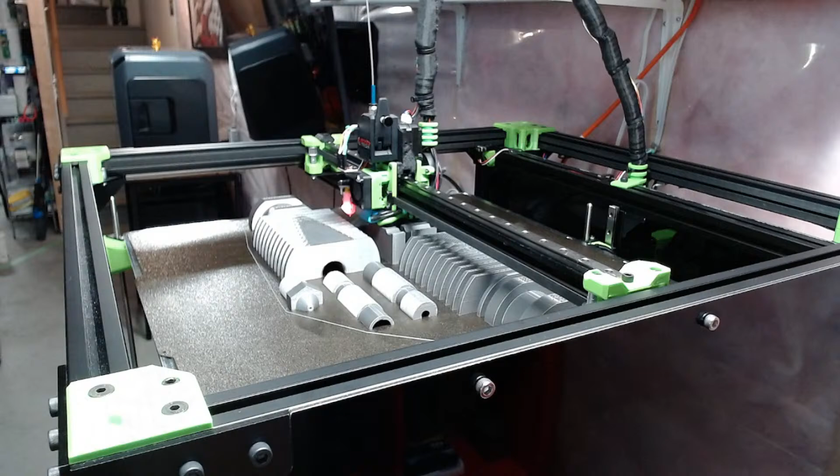I have over on this little printer over here, the Rat Rig actually working tonight - oh, and look, of course my camera's frozen when I go to put it on. But the Rat Rig is printing the E3D V6 full-size, or 500% scale model, sort of like I did those other hot ends.

That first hot end model I did, which was the standard hot end, is now available on Cults 3D, you can look it up. And then also somewhere in this room - oh, it's just over here behind me - I have the all-metal Micro Swiss hot end that's just about ready to be popped over onto Cults with all my STL files and pictures. I just got to take some pictures of that thing.

So that's kind of what's going on. And I've got the FlashForge Creator 3 over there busy printing a few of the black parts for this build that's happening tonight. I decided on the olive green and some of the black parts.

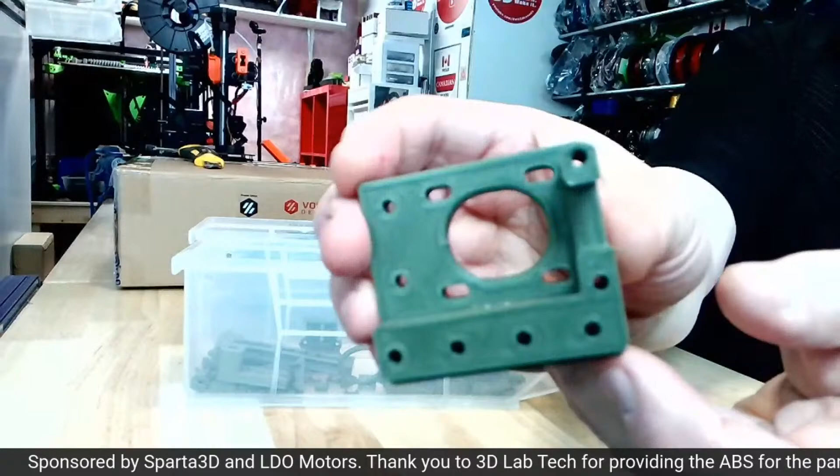Like, we're speaking zero cleanup. If you check out the quality of these prints, this is how they're coming off the printer. And the holes, zero cleanup, period, on these parts.

I'm just saying I'm quite impressed with it, but I'm also overwhelmed by the number of parts that are involved in this.

Let me grab my mouse. And Brent Miller, hello, welcome. Thank you, you installed a copperhead mini bimetal heat break and a nickel-plated copper nozzle on your Creality hot end. Oh cool, I have to look into that.

You hear its name a lot, Sith Lord or Brett? Yeah, me too. And I relate Voron and Klipper, those two. Now that I've got a little bit of familiarity with Klipper from the Rat Rig, I figure, what the heck, it's time to build a Voron, and this little guy will be on display at the Calgary Maker Faire happening in May.

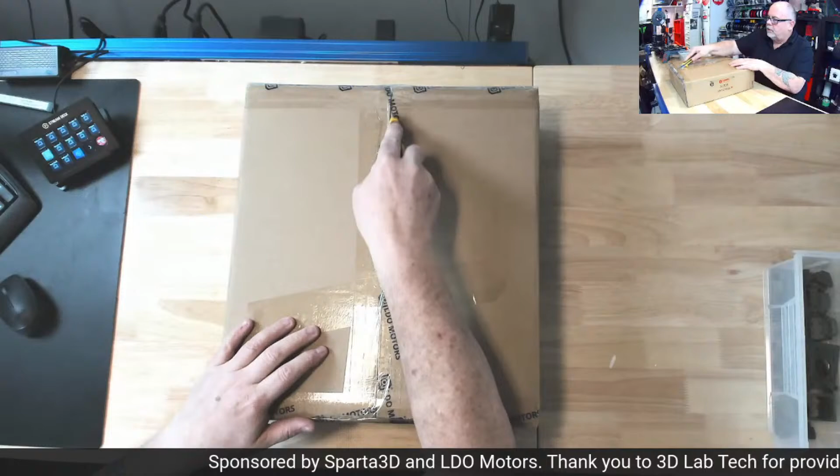And I see by the label on the side here that this is the black, I'm getting the black frame. I was wondering if the frame color would clash or go with the olive green parts I'm printing, which I call mash green because they kind of remind me of the colors of MASH, for all you old fogies who remember that television series.

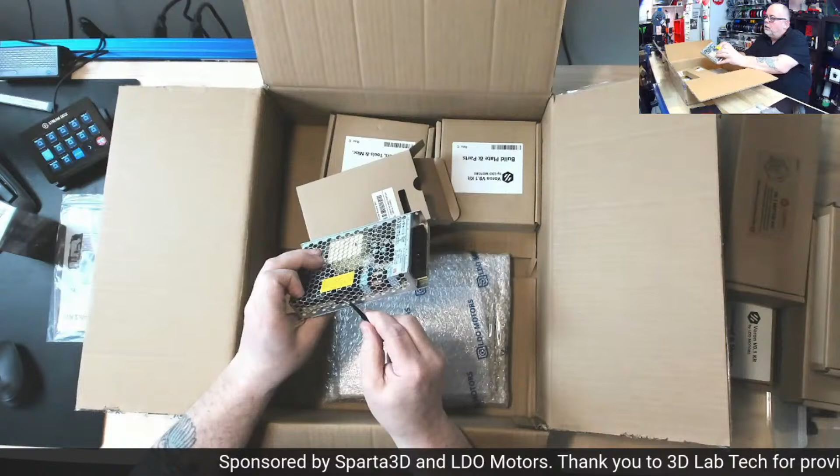In this little box we have a 24-volt power supply, and let's see, is it a branded power supply? It is a Meanwell branded power supply, 24-volt. And before I forget, while I'm doing the unboxing, I am going to flick that little switch over to 115 volt, so I don't forget that later. Well, it's on top of mind. So nice little power supply, nice to see them using a name brand Meanwell. And it's a 220, 24 volt, 150 watt, I think. Let's see, I think that's what it is. Yeah, okay. And they even tell you on the note there, make sure you check your power switch, so it's set for your proper country.

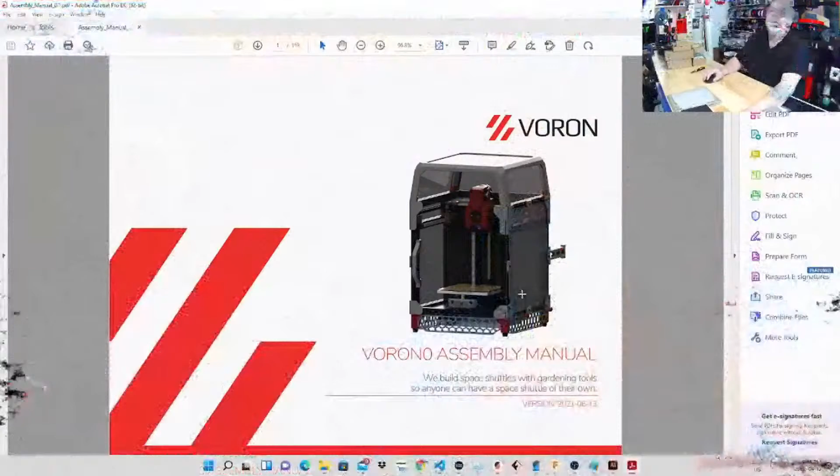So I'm going to just open a bunch of these parts right now and have a look at them. And I do have on this other screen as well, on the bottom left, I can show the full screen on that one too. I do have the assembly manual ready to go. One thing the assembly manual does mention is basically to confirm all the parts that I have received. And that's always a good thing to do, to confirm the parts before you dig too deep into the build, because the last thing you want is to get somewhere and say, oh crap, I don't have a part for this.

So I'm just going to have a quick peek at this. I have a Voron design sticker, and then this is basically a bill of parts that they have provided, and it's wow, 100 zip ties. They give you everything here, like 130 M3 hex nuts, 110 square nuts. There is a lot of hardware that goes into this little guy. Man, it seems like even more hardware than I had for the Rat Rig, but that's cool. That's very cool.

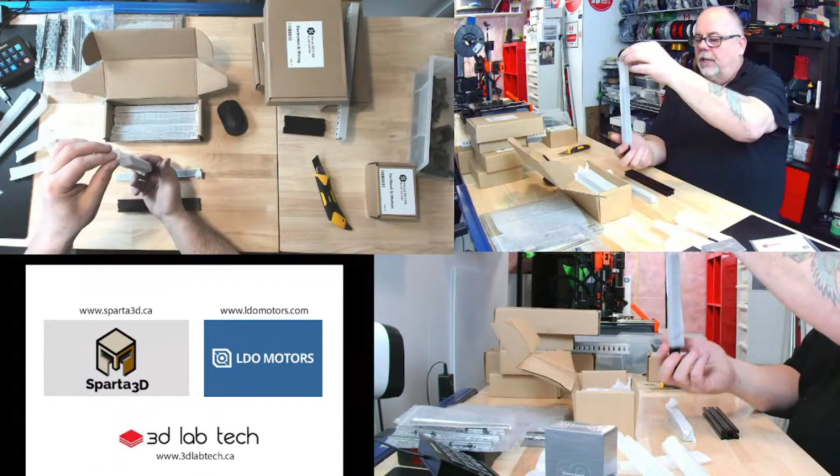Put in front pocket, give wife a hug. Just kidding, don't listen to that. Okay. Matt, do I ever listen to you?

I tell you, okay, we're just going to pull all these rails out. This is going to take up a little less space to build than the rat rig did, right? For all of you guys that saw the rat rig build, it was a beast. This is like Beauty and the Beast. So let's just get all the rails out of here.

Pop that over there. We are a responsible builder, we recycle all of our cardboard. Well, I don't, I give it to the recycle people in the city. No, I don't.

Okay, man, a lot of rails. Apparently this is like an enclosed build, it's got a top hat on it, and all kinds of stuff. I still have a lot of pieces to print, I've been printing all week nonstop on that printer. So it has a night shift, a morning shift, and an evening shift. When these prints finish, which have about another 2.5 to 3 hours to go for these black parts, then right away more parts go on. Because I still have to print all of the pieces for the top hat, I guess is what it's called on this thing.

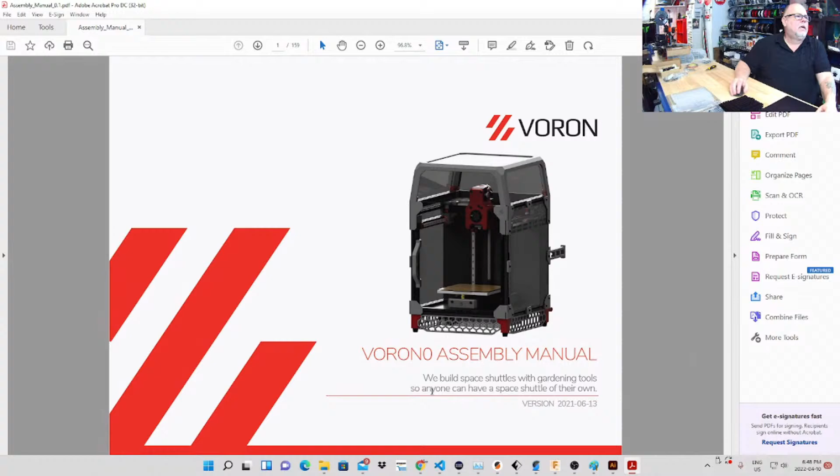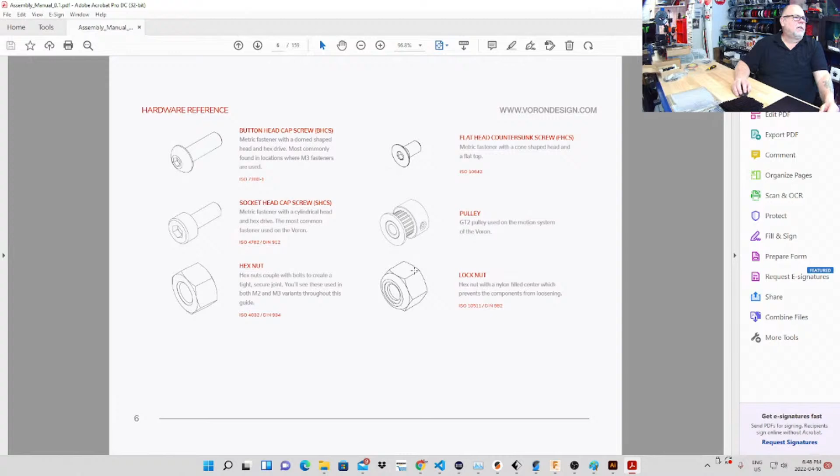Let's have a look at the manual here real quick. Not real quick, but we're going to browse through this. So we have the introduction, the hardware reference, so they talk about the hardware and the different kinds of screws - socket head, button head, flat head, etc. Then pulley versus, so we have a locking nut and a hex nut. And they're talking here about the blind joints and how they work, which is really kind of cool.

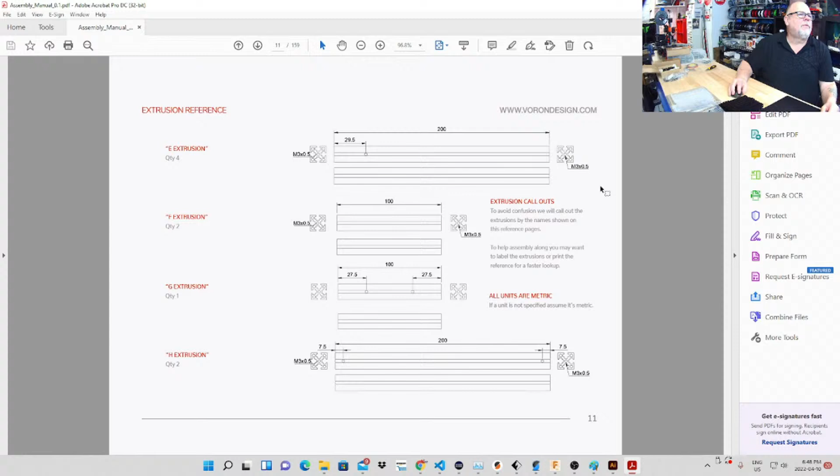Then the extrusion reference. Here's a reference for the different extrusions, A, B, C, D, E, F, G, H, and they all have subtle little differences as far as how far in your blind joint screw holes and so forth are. But they look like they're all M3 by 0.5 screws to go in them. And there's the frame assembly, which I'm guessing is going to be the first thing to do. Studs with nice racks - I didn't go there, all I can say is I did not go there.

Anyways, there we go, so component prep. Okay, heat insert - we're going to have to do heat inserts for sure on some parts. Cable chain, remove the end link. And heat set inserts - the design relies heavily on heat set inserts. I haven't done many of them, but make sure you get the proper inserts, check the hardware reference. If you've never worked with heat set inserts before, they recommend you watch a guide. I will watch the guide, I'll look for it. Let's see when we need to do the heat set inserts though.

So do I need to start prepping these components right now? I'm just seeing, yeah, so I guess I have to start prepping all this stuff is what it's saying. Okay, well, let's - okay, it's like, where do I start?

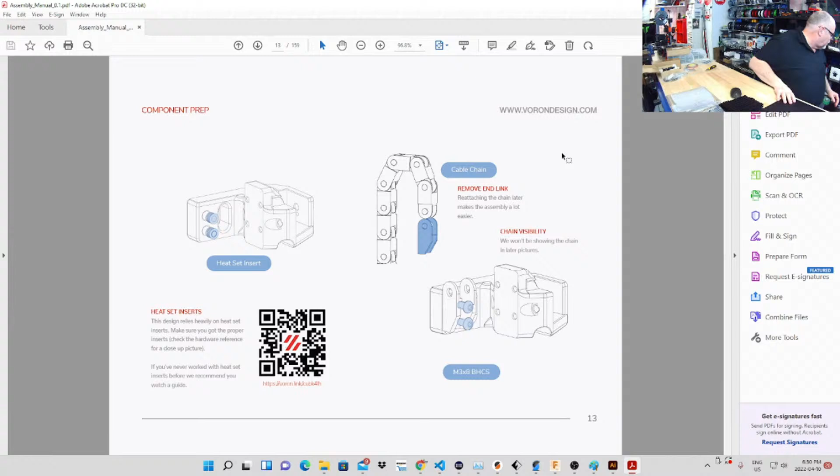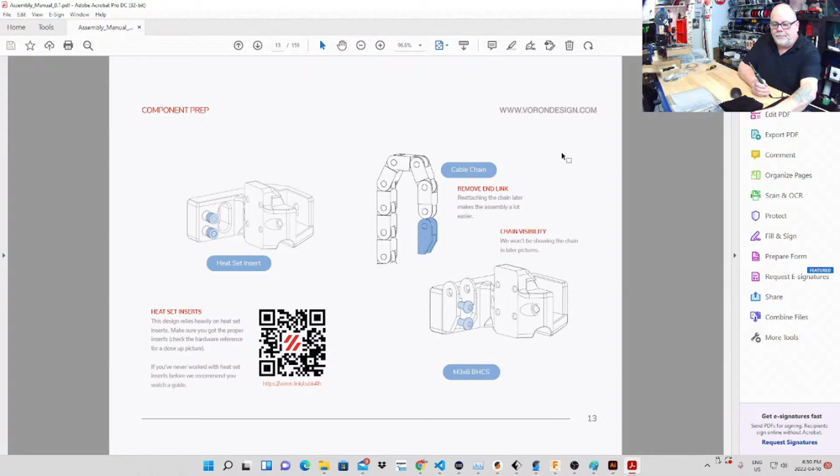First thing I'm going to check, I'm going to grab my Weller and see if this heat insert tool actually fits on my soldering iron. I know that sometimes they don't, but then again, let's see. So here's the heat set insert tool.

Well, it looks like it's even got heat sets already on it - there's 2 heat sets on it, because it's got threading in it. Oh I see, you thread them in, I think. Anyways, that's why I got to watch the little video. So let's just see if it fits on here. Let's undo this, we pull this out, we put this - come on, please fit. It doesn't fit. Don't tell me. You'd think it's too big. It's too big, darn. So that means I have to go buy a cheap soldering iron to fit this heat set insert in.

I'm surprised, I thought they would be standard. But yeah, if you look in visual you can see it. So if I go to my close-up cam, you can see the difference in size. The top one is the soldering tip that's on my Weller currently, and the bottom one is the heat set insert they provided. It's slightly bigger, but it's just big enough it's not going to fit in. And I have another soldering iron over there but it doesn't have changeable tips, so I'm going to have to get a soldering iron. This is a good Weller, it's part of a soldering station, so I'm going to have to pick up a cheap soldering iron from the hardware store, but I'll bring this along to make sure it's going to fit. So I cannot do that part of the prep right now.

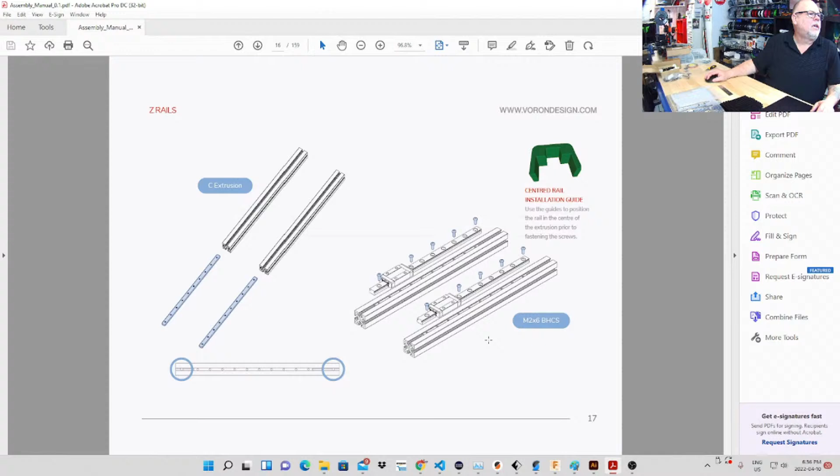Okay, I'm just going to scroll ahead a few things and have a look at what's going on here. So we have rail positioning, Z rails. We have the centered rail installation guide, which I printed. So they definitely want me to prep all these things in advance, for sure. Okay, good.

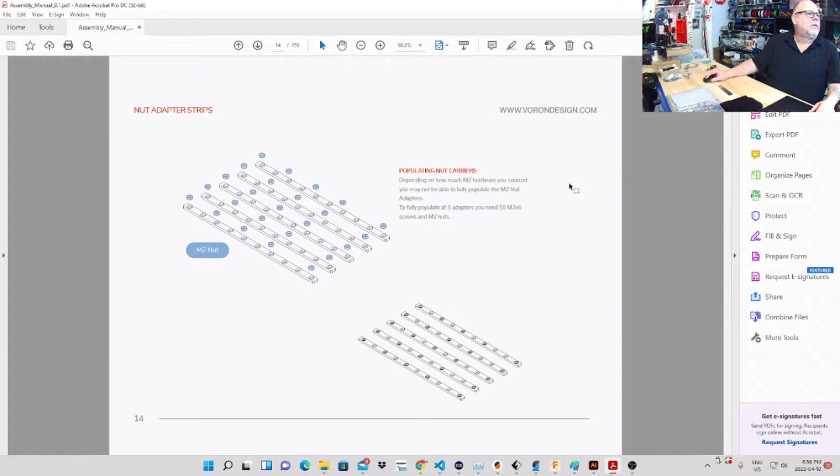Okay, well, let's go and look for the M2 nuts, they're going to be tiny. Open the hardware bag. Here we go, open the hardware bag. You thread directly into them. Oh, okay.

Okay, so if it says prep, let's see what you say. Oh I see, okay, you thread directly into them with the linear rails. Oh I get it, okay. Okay, I may not be able to fully populate them. That's what it means, okay I get it now.

Okay, let's find out which rails I need though. I need the rails that is the E extrusion. So let's go back up to our reference, the E extrusion. Let's make sure, because there's a lot of extrusions here. So the E extrusions have the holes 29.5 millimeters in. Definitely not that one.

Okay, this is why I think it takes a little time to do this, because there's so many, let's keep the ones that are similar all together here. There we go, and that's got no holes in it. No holes, no holes. Okay, that looks like an E extrusion right there, and that's because it's got the holes in one end. And that looks like one there.

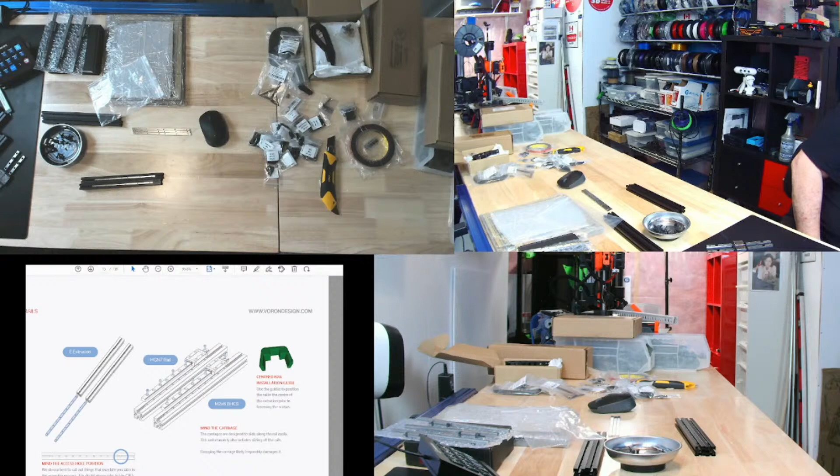This one is, I'm going to guess. There we go, I like to use my little tools. And yeah, you know, some people say, no, I want to use the tools provided by the manufacturer. But you know what, if you have better tools, use them. That's what I say. No disrespect to anybody else.

Okay, so basically we go in, and I guess positioning isn't really critical right now, so we have this on top, and they just sort of sit on the rail. It looks like they just sit right on the rail.

And it talks about positioning in the next one. Mind the carriage - it's designed to slide along the rail easily, but unfortunately that also includes off the rails, and dropping the carriage may damage it. Use the guides to position the rail in the center of the extrusion prior to fastening the screws.

Okay, so I can get the screws started here. This is where it becomes... on the rat rig I did a lot of this stuff in advance. Let's see, did I hit a hole? I hit the hole, okay, so I'm going to just get all these started. I did this in advance on the rat rig because I could. I guess I could have done this in advance here too, but I would have already unboxed all the parts and started, and you guys would not necessarily have gotten a fair view of it. But you know what, it's good to see all the work involved. So what the heck, all we're doing right now is getting all these screws started, not tightening anything. To me it looks like there's enough screw to hit every hole.

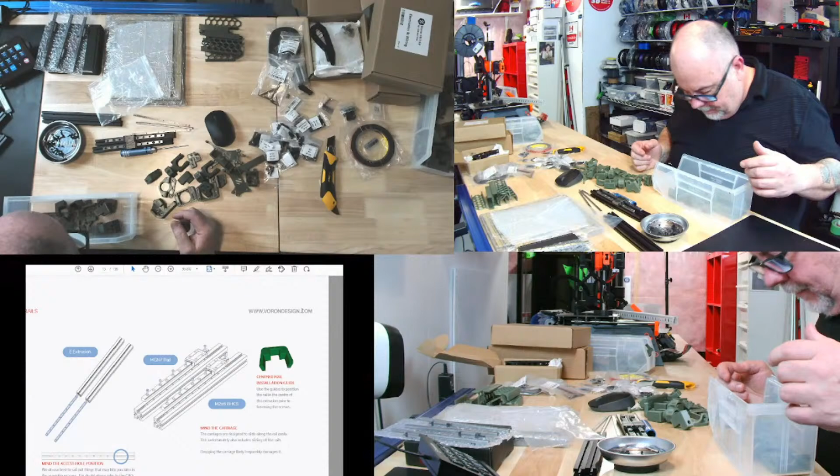For those that just joined, I printed all the parts out of ABS, and they were all printed on the FlashForge Creator 3. It's the only enclosed printer I have. There's one right there, and there's the other one right there. First time running ABS for the most part. I've run a bit of ASA, but I've never run a big job on ABS, and I am flabbergasted as to how well these parts came out.

Super, super clean, okay. So now we've got all these in, and it says to mind the access hole position, which is right here under my finger. They're going to give me a specific measurement here.

So 38 millimeters. Where is my trusty zeroed caliper... there it is. Calipers? Yeah, I think that's called a caliper. Doesn't matter, it's what I'm calling electronic digital caliper.

42 spools on the new rack with 4 PLA plus braces, not all full spools. So it's working for you, good stuff. Last saw the rat rig build, nice to see more variety of builds. Good, Canuck builder of course. Where are you from, Phelan?

Cool, so they want 38 millimeters in. Let's lock it at 38... oh, this doesn't have a lock on it. These are just cheap ones, but they're carbon fiber, very lightweight. I like them because when I'm measuring magnets it's so much easier. Let's go 38 millimeters. 37, 38.3, 38.2... come on, 38 millimeters, there we go.

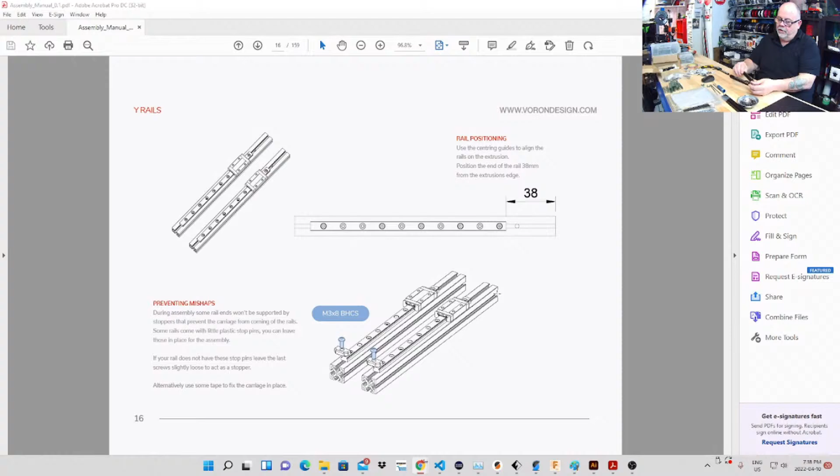Alternatively, some tape, okay that's good. They've got these on as stoppers on this end, but what do they do for stoppers on the other end? I don't think I'm going to put them on right now. I'm going to leave these for now because these rails came with stoppers built into them. And of course LDO in their genius minds, you didn't have to put a screw in where the stoppers are. There was no screw, you only had to screw the screws in where they screwed them. So I think we're okay to have those just like that without the stoppers in them. I'm not going to worry about that right now.

So let's get on to the next page here. We're going to do the Z rails, which is the C extrusion. So we're going to zip back up to this, and ABC extrusion is the 7.5 - so that's going to be these ones here.

So the C extrusion has holes on both ends, and they're 7.5 millimeters in. So we'll just confirm that these are, in fact, 7.5. We're on the C. And that is correct, just like to double check - 7.5 millimeters in, we're good.

Let's go back on the Z rails, and we're basically going to do the same thing.

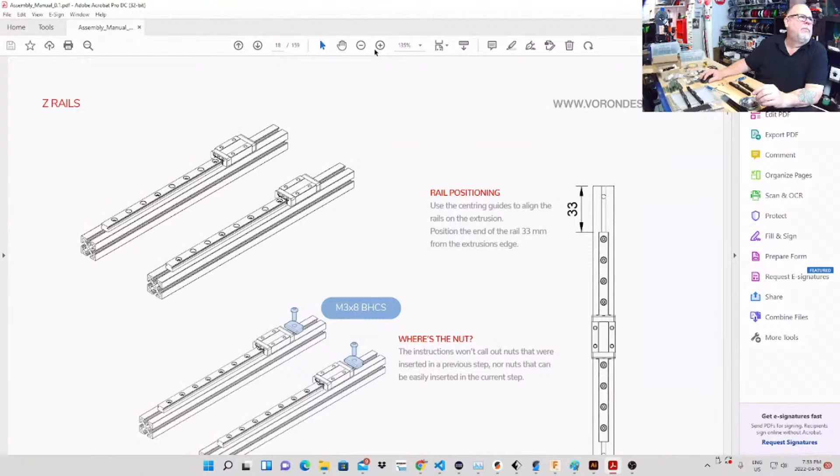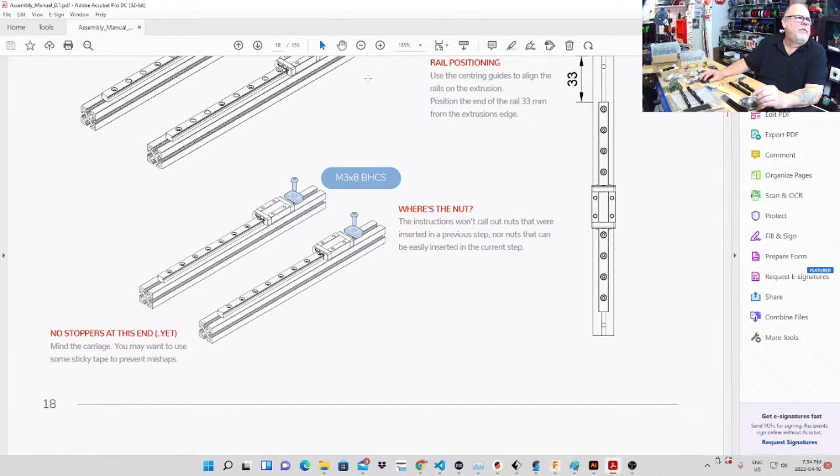So right here, if you look, it's saying - and I can zoom in a little for those like me that are kind of blind - right here it's saying to put those end stops in. Now there's a couple things. Right now there's an actual hole down here in the rail, but put the M3x8 in. Oh, maybe I got to read that. The instructions won't call out nuts that were inserted in a previous step, or nuts that can be easily inserted in the current step. It didn't tell me to insert any nuts in the previous step. Or did it? Maybe it's just me.

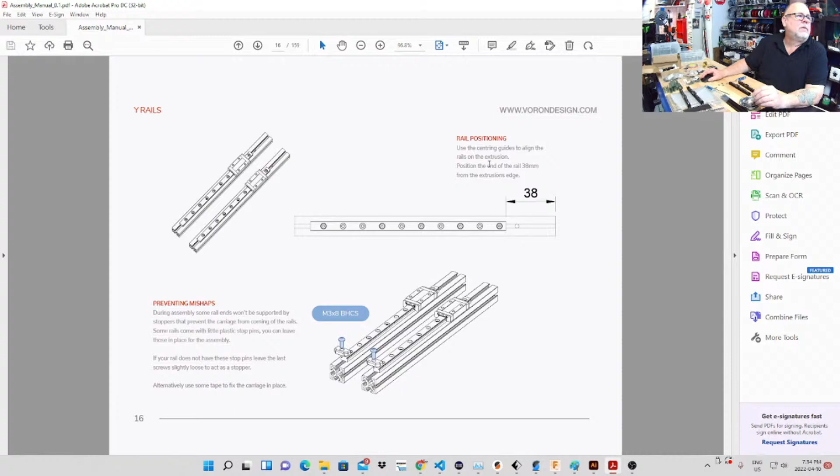No, nowhere in there does it say to insert nuts. And in here, there is nowhere saying to insert nuts. So do I need to insert nuts under there? Maybe I do. You need a nut. Okay. I just, honestly, it doesn't say that. I'm looking.

Mind the access hole position for the carriage design to slide along easily. This unfortunately includes the sliding off the rails, blah blah blah, preventing mishaps. Plastic pin stops. Okay, well, we'll put them in.

Let's go to the Z. We'll put them in. Let me find some M3x8 square nuts, or M3 square nuts. Where did I put my nuts? All these bags... square nuts, M3, 110 pieces.

Okay, you guys see, that's why you have the community help, right? Because you guys have built these before and you come across this. But it just says the instructions won't call out nuts that were inserted in the previous step - there were no nuts inserted in the previous step.

So this is where I will grab a couple of my square nut helpers. That's a hex nut. Where's my square nut helpers? That's a hex nut - when I want to pull a square nut, I pull a hex nut, and when I want to pull a hex nut, I pull a square nut. Square nut, hex nut, square nut.

You're going to need 4 of them. Square nut - don't drop your pieces, Tim. And one more square nut. Do I have one more square nut? And a... dun da da da. Come on, stop mating with that. Square nut, there we go.

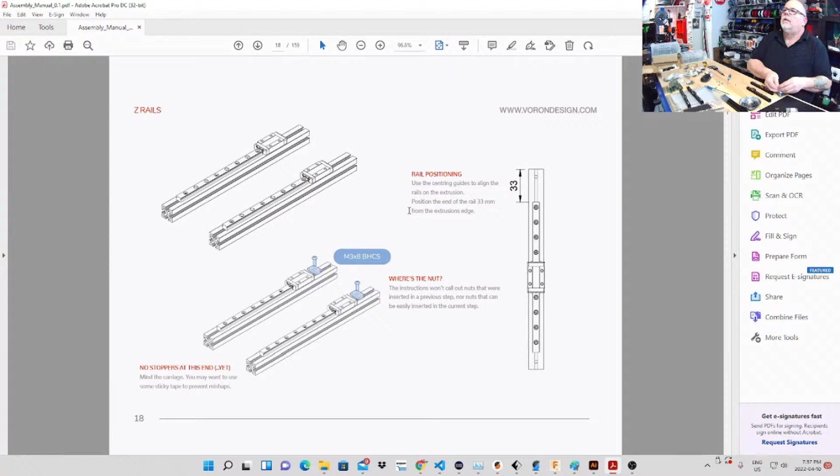Well, maybe that's good. And then we use our 8mm M3x8. I use the square nut - I got the square nut adapter right now, so that adapter makes a huge difference. The square nut's not rattling around in there on me. And let's see if I can actually grip it. And it works, look at that.

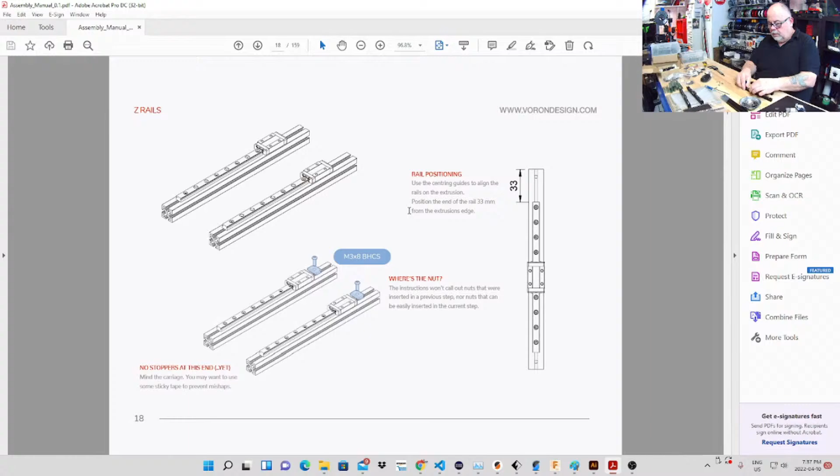There it is. Okay, that's what we had to do, right? Well, it helps if I change the screen. So there it is, right there. Oops, in the end. Now it says not to worry about the other end for now, so I won't worry about the other end for now. Don't mix these up.

That was this way. There we go. Okay, pull this plug out. Don't need to keep these little plugs, but I'm a hoarder, so I will. And another square nut in here, a nut in here. These little adapter things, it's actually a great idea. There we go, push that guy in.

Grab an M3x8. Having fun yet, everybody? We still have an audience, so that's a good sign. Okay, let's put that in, make sure we're all the way up.

There we go, we have a stop. There's those two. Now we'll go back, make sure I get it on the right end. They want it on the short end as opposed to the long end. Okay, short end on the Y rails. There we go. Y-axis rails only get a stop on one end. Z-axis gets one at each end.

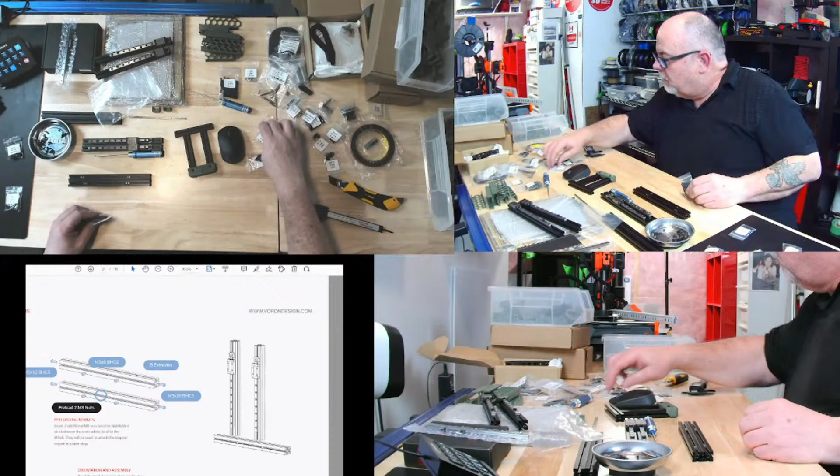Where's my M3x6 button heads? There's one bag that's not labeled, and that looks like it's going to be a button head. It's an M3. Since no other bags are labeled M3x6 button head, I'm going to make an assumption - and I know sometimes making an assumption makes an ass out of you and me, but I'll assume that's an M3x6. I'll measure it too to be sure.

Hey, Maker Viking Thomas, how are you, sir?

Okay, 8 o'clock. We'll go 30 more minutes at the absolute latest, then we got to shut her down. Okay, so I need 4 M3x10 button heads right now. We're going to start them in the end, and I've learned not to tighten them because these are going to be blind joints. That's cool the way those work.

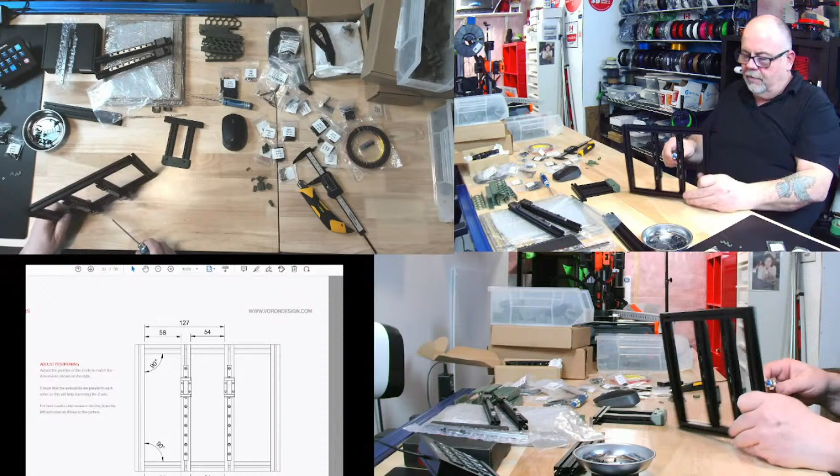It's interesting that the instructions didn't quite - well, I would do it a little differently in a sense. I would, and I may come back and do this. So I measure, so I would...

Personally, and I may do this, take these two off, which I can because I've embedded the nuts in the back, or take one off at a time, make sure I'm 90 degrees, get this outer frame square first. Then go ahead and mark my 54 millimeters, and of course on the ends, 58 millimeters.

Oh, hopefully I did 58. Oh, I did 58. So I can double check that. And I'm 58, and I'm 58. I'm right on.

But being right on is okay. But if this isn't square - if this part here isn't square, too many cameras - then what's the use?

So I'm thinking what I'll do is get a little square, take these off, measure, make sure this frame is square, snug it up square, which it should be. I think it is. If my eyes are pretty good, I'd say that's square.

And I can also tell by measuring corner to corner. So theoretically, I should be able to - if I had my tape measure handy, which I don't - but then this thing won't quite fit that distance, will it? Unless I go like this. I can eyeball it, but I'm going to do it better after. So I can eyeball it and say that distance is equal to that distance. So right now, they are exactly the same.